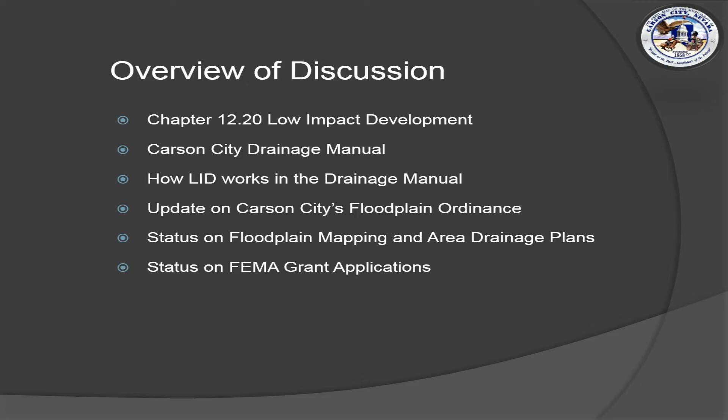So Carson City is going to add a new section to the municipal code. It's called Low Impact Development. It will be section 12.20. And the purpose of LID is stated below here. I'm just going to read through these. The city is committed to stormwater and drainage management programs that protect water quality and water supply by employing watershed-based approaches that balance environmental, conservation, and economic considerations.

Urbanization has led to the increase in impervious surface areas, resulting in increased water runoff, causing the transport of pollutants to downstream receiving waters. The city seeks to manage rainwater and urban runoff while mitigating the undesirable impacts of development and urbanization.

LID development standards are widely recognized as sensible approaches to managing the quantity and quality of stormwater and non-stormwater runoff. Management of stormwater and non-stormwater runoff is accomplished by setting standards and practices that maintain, improve, or restore the natural hydrologic contours of the site, reduce runoff, improve water quality, and provide groundwater recharge.

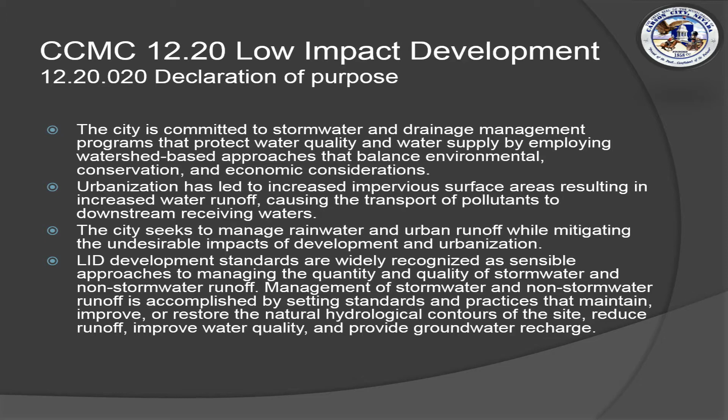A few more items under the purpose are LID development standards promote public health, safety, and general welfare through standards and incentives to ensure both private and public development provide adequate protection for citizens and property, to minimize offsite runoff of properties, to minimize and control erosion and pollution impacts on the natural environment, to minimize maintenance costs for drainage and flood control systems, and to recognize stormwater as a resource.

While the city seeks to minimize offsite runoff from properties through the implementation of LID development standards, compliance with this chapter will not ensure that there won't be any unauthorized discharge of pollutants to the waters of the United States. So that's quite a bit of items that we list under the purpose, but they all make sense as far as what LID can do to help improve water quality.

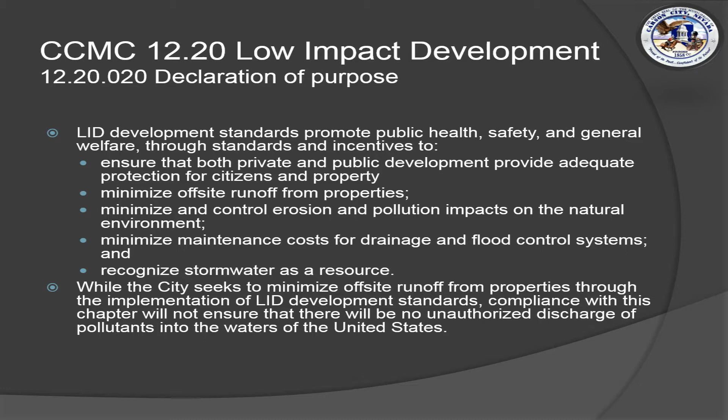We're now to the Carson City Drainage Manual, and I wanted to point out a few things that the manual has that's different from before. First of all, the previous drainage criteria from Division 14 of the Development Standards are included in the manual. The manual requires low impact development for all new development and redevelopment. And the manual provides control design criteria for both flow control and volume-based control of stormwater.

The other change that we've done in the manual is that we've changed the minimum design storm from the 5-year 24-hour storm to the 10-year 24-hour storm. So the criteria before is that the basin's size is based on the difference between the pre and the post storm of a 5-year event. Now it'll be the pre and post difference from a 10-year storm.

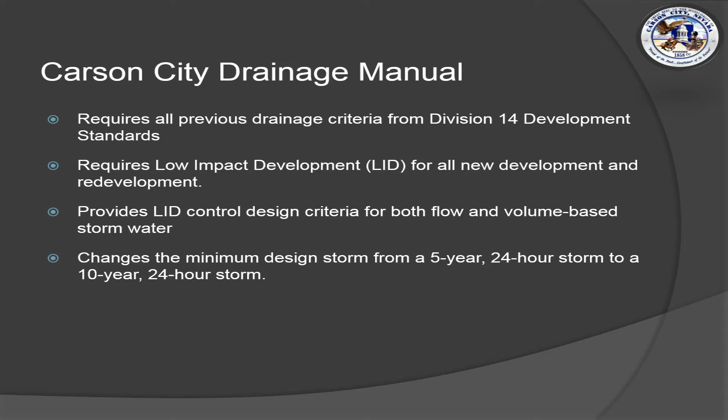Some other key items in the design manual is that the LID design criteria allows some flexibility on the LID controls that may not be suited for all of the sites in Carson City. Some sites have high groundwater or some other things, possibly wellhead protection, so some of the BMPs that would be used normally in a LID situation wouldn't be available for those. And so there's some flexibility in the design of LID.

The other thing is we've got a 1-to-1 volume credit for LID facilities to detention volume. So if someone wants to do more, that will certainly go as a credit against the volume of a detention basin.

The manual also provides a list of various BMPs and LID kind of controls, either source control or different ways that they can treat the runoff from the site and filter the pollutants out. And at the end of the manual, we've got recommendations on maintenance for the various types of LID BMPs that are used on the site.

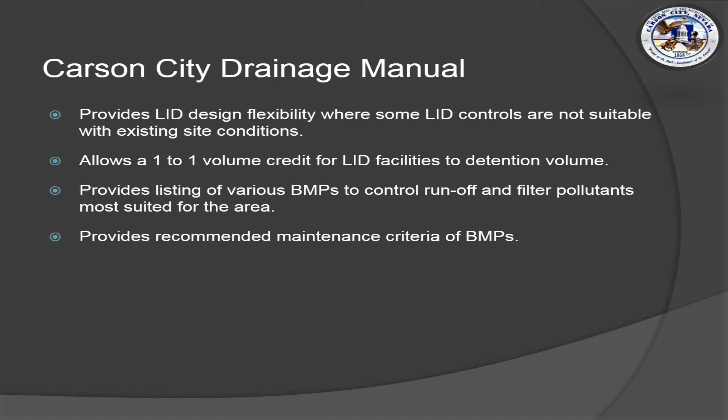So how does LID work in the drainage manual? First of all, the LID is not a separate chapter in the drainage manual. It's incorporated in the manual. So as you're working through a site and looking at the impacts of drainage, you're also considering the LID as you design the site and look at what type of impervious areas do you have, how those connect to the landscaping requirement, the road, where the storm drain is. All those things matter. So it's not like an afterthought that you would figure a way to add in an LID BMP at the end of the design.

So the criteria for LID, you've got a choice between flow control or volume control. So if you're going to use flow, you have to design your LID facility to a 2-year flow, 2-year design flow. And then if you're going to do a volume, we've got a formula that calculates the 90% annual runoff volume. So those will be used in your design for those facilities.

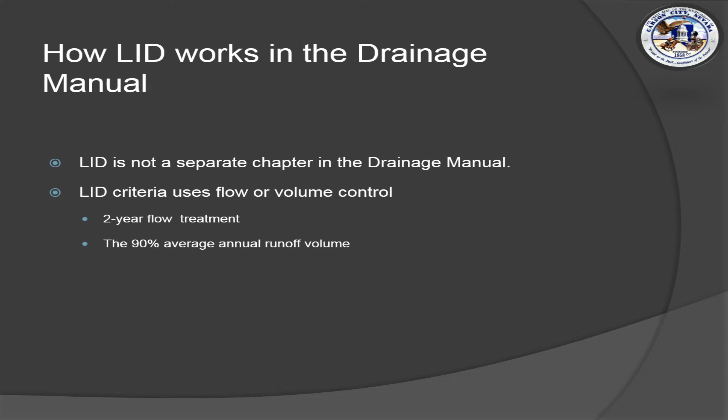Some key items for LID design is to figure out whether you've got non-pollution generating impervious surfaces or pollution generating impervious surfaces. On the non-pollution generating impervious surfaces, roofs that don't leach would be considered clean water, and you've got things like paved bicycle paths, sidewalks, things like that that are separated from where motor vehicles are parked. Those would be considered non-polluting. Fenced fire lanes, and of course you've got maintenance roads that are infrequently used by vehicles. Those would be considered non-polluting sources.

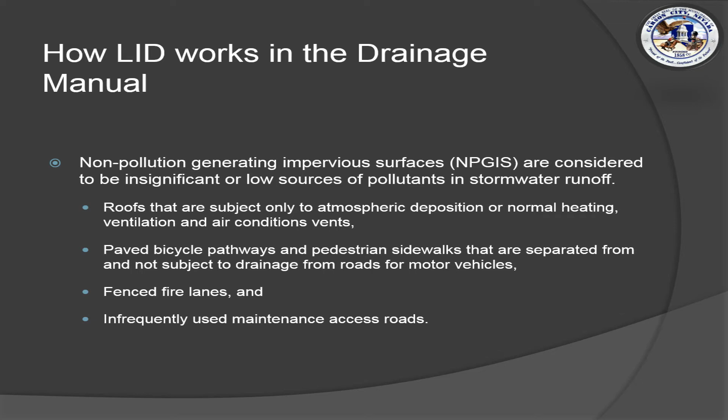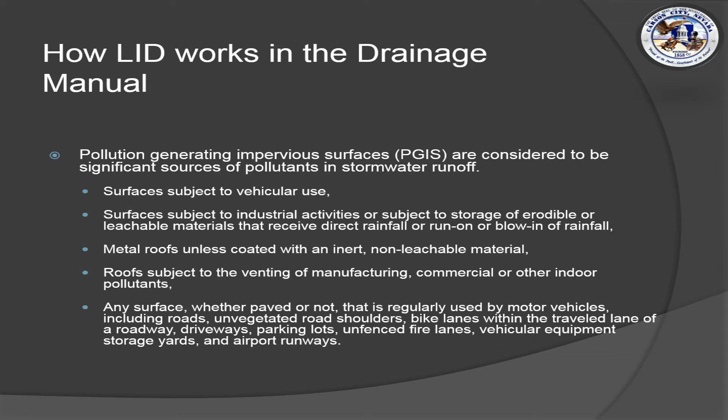We've got some criteria for high use sites, and a list of what that means mainly has to do with petroleum products, and also high use intersections, road intersections that have ADT of 25,000 vehicles or more, and any side intersecting roadways of 15,000 ADT would be included in that. We've got commercial industrial sites that also generate traffic, which would be in the high use generating sites. And we've got a list: vehicle, customer, and visitor parking with counts of 300 vehicles per day. And also at the very end there, commercial on-street parking areas that expect ADT counts greater than 7,500.

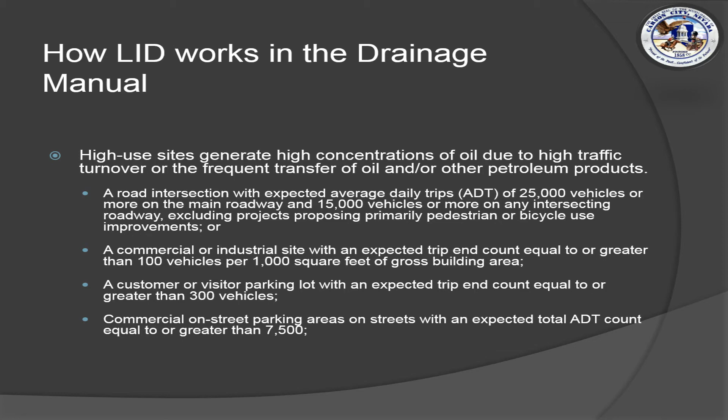Some other high use sites that generate high concentrations of oil and petroleum products obviously would be fueling stations and facilities, other commercial or industrial sites that store petroleum, those kind of things, or have routine delivery of that type of thing. We've got fleet or equipment storage areas, obviously any kind of outdoor areas that have hydraulic equipment. Those would all be considered high use sites that generate these pollutants.

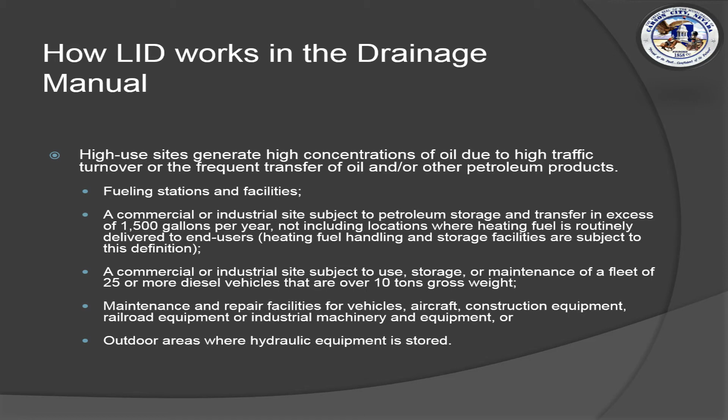Some other things in the manual, we list some BMPs that can be used in this area. And obviously we can't list all of them. There's lots of different ones around. We do reference the Truckee Meadows manual and some other manuals that may be used in certain situations. But we tried to include LID devices and facilities that would fit in Carson City. We give a list of kind of how they rate with each other. Some are good for certain things like heavy metals or nutrients or different pollutants. And so it'd be good to look at those and figure out what fits the site as you're going through the design.

We also list maintenance criteria in the manual. So if you do pick an LID facility, it's good to know how to maintain that. You may look at long-term maintenance. One might be a better fit than the other one, given maintenance considerations.

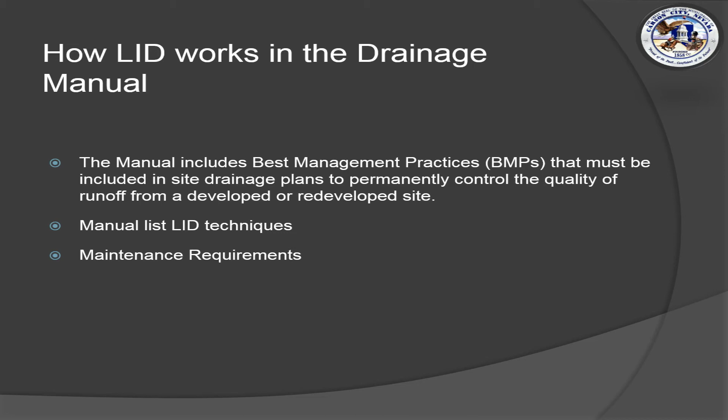Update to the Carson City's Floodplain Ordinance. So the ordinance was submitted to the DA for review in May of 2019. The update included the Carson River hydraulic model. It also included the Carson River hydraulic model management, distribution, and update guide. There were some other definitions and terms added to the ordinance.

We also included some criteria related to fencing, landscaping berms in a special flood hazard area. Currently, there's no law or regulation against fencing the floodplain. I know people think, yes, it's going to break away. That would be true if there was a lot of flow, but if there's a minimum amount of flow, fencing

and landscaping tends to guide the water to undesirable locations. And so we put some criteria in the ordinance related to that. Not to say that it would be not allowed, but just to be able to think about how it's being done and how it can not guide water to where it's not desired to go.

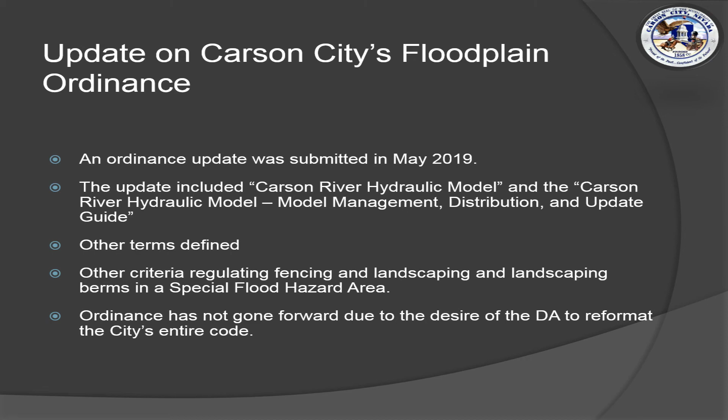So we did submit that. It's kind of not gone forward because the DA wants to reformat the city's code, and that whole reformatting takes quite a long process, and so it's kind of held up in that respect.

Now I'd like to give you a status on floodplain mapping and area drainage plans in Carson City. We've got a few going and give you an idea of what's going on there. Last May, we went through a process on the Goni Watershed and did a restudy and remap, and that became effective in May 2020. And basically, it includes the airport and areas north of the airport down to the freeway.

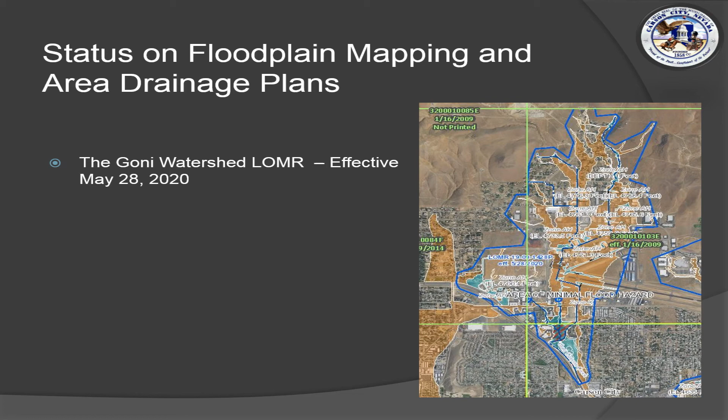This one here, we completed an area drainage plan. This is the North Carson area drainage plan, and it was adopted in March of 2020. And the areas that were looked at were mainly areas north of Highway 50 East and east of I-580, and that's kind of the Sugarloaf area, Goni Canyon Watershed, Eagle Valley Golf Course there in the green, and then kind of New Empire is down between the river and just south of Highway 50.

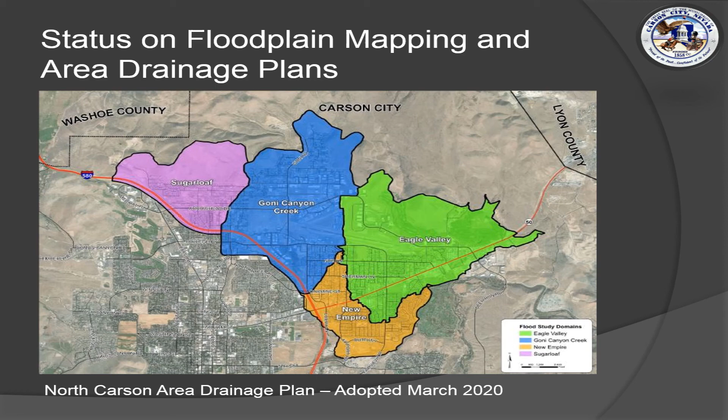So that was a process we went through. We identified, I think, 9 different projects, and they were rated. And that report was adopted by the board, and the improvements were put in a priority, and that went very well.

This next one here is a map and restudy of the Voltaire and Saliman watershed, and we're currently waiting for the 90-day public process to begin. It hasn't begun yet. We haven't received the preliminary maps, but we do expect the maps to come anytime this spring. And I know there's quite a few people in the area that are happy with the results.

A lot of the special flood hazard area is gone. There's a shallow flood hazard, 500-year, less than 1 foot, 100-year floodplain that runs from the freeway to the south where it connects to Spooner and then runs north along Saliman and towards the linear ditch.

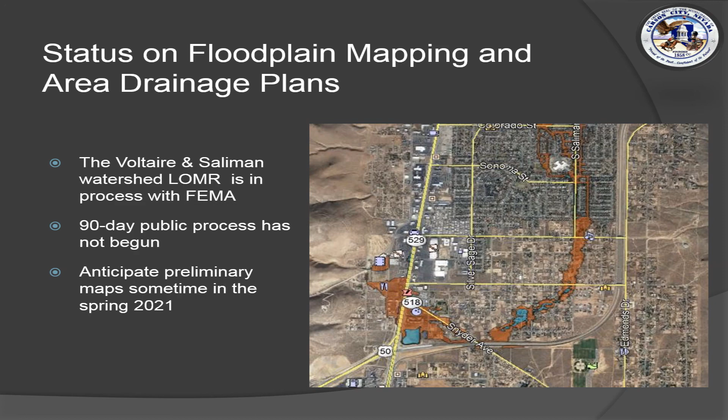This area drainage plan, this is the West Carson area drainage plan. We're still working on the report and the items that would help reduce or eliminate flooding on the west side of Carson City. We went through a public process and got some input from folks that joined us on a Zoom meeting, and we're basically dealing with flows from Kings Canyon Creek, Ash Canyon Creek, coming through pretty much the center of town.

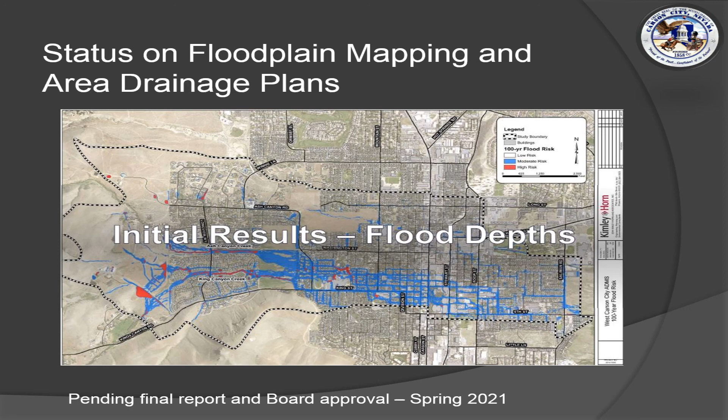We've got a couple of grant applications that we've submitted to FEMA. One of them is the Sutro Terra Storm Drain and Basin Scoping Project, and that's not actually building anything, but it's scoping what can be built and the costs to get that done and evaluated. So that's a scoping project grant. And then the other one is the Maxwell Basin Flood Mitigation Project, and that is a basin in the Goni watershed that would eliminate some of the flood hazard in that watershed.

All right, well, that's all I have for this update in this presentation, and I think we are going to go to questions. All right, thanks a lot.